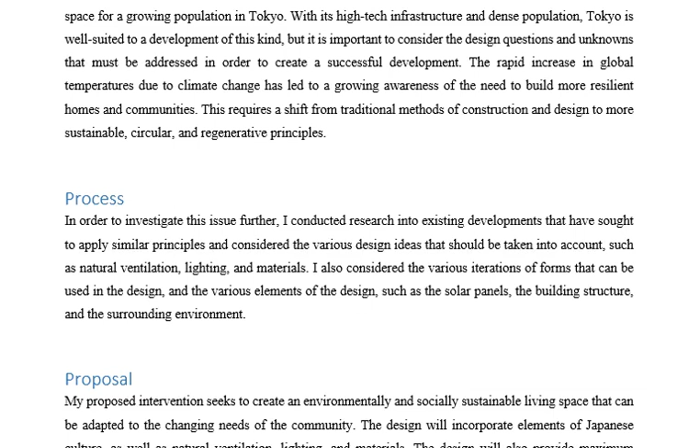Secondly, I also considered various iterations of forms that can be used in the design, and later I will share the design. So the focus is on renewable energy, which is solar panels, building infrastructure, and surrounding environments. There are many things to discuss here, but as time is short, I am focusing on the main things like project location.

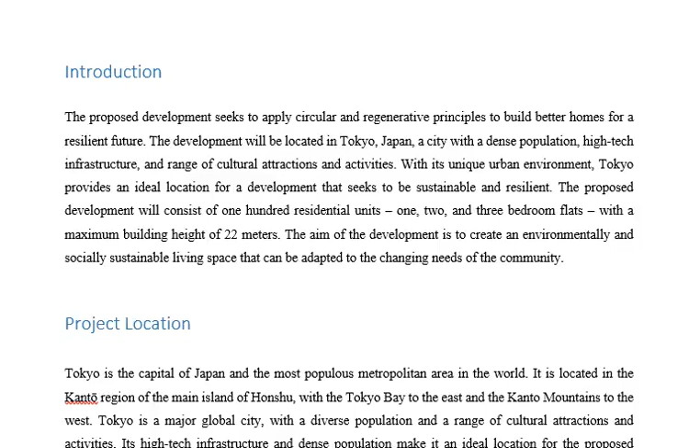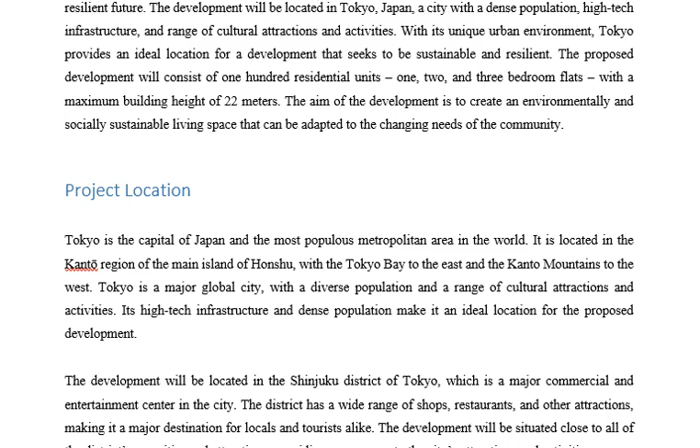Tokyo, as I told you earlier, is the capital of Japan and the most populous metropolitan city in the world, not just in the region but in the whole world. It is located in the Kanto region, and the main island is Honshu. So I selected this region for my prototype.

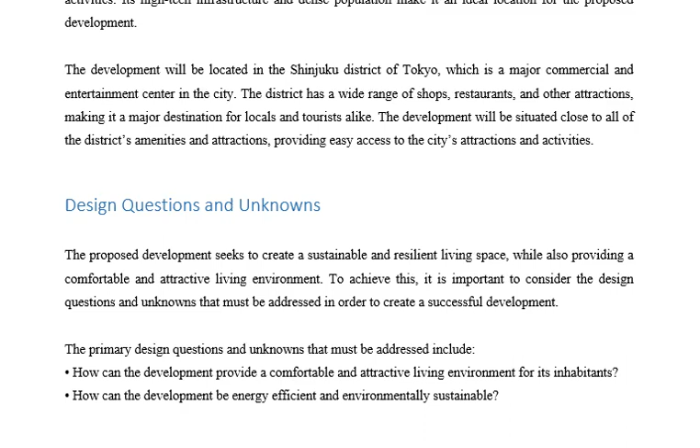The main design questions are: how can we develop and provide a comfortable and attractive living environment for the inhabitants, and how can we develop an energy efficient and environment friendly sustainable environment. There are a few more questions, but the initial research is focused on that.

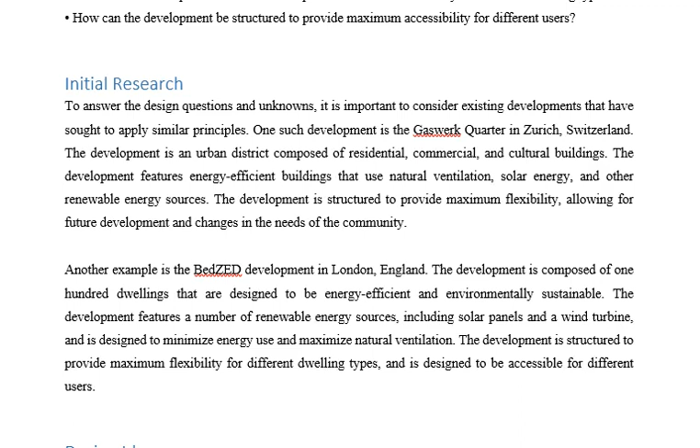These types of prototypes have also been deployed in the current world in Zurich, Switzerland, and also in London, England. But my prototype is totally changed from that because I have reconsidered many things and many ideas. Basically, I focus on four main ideas.

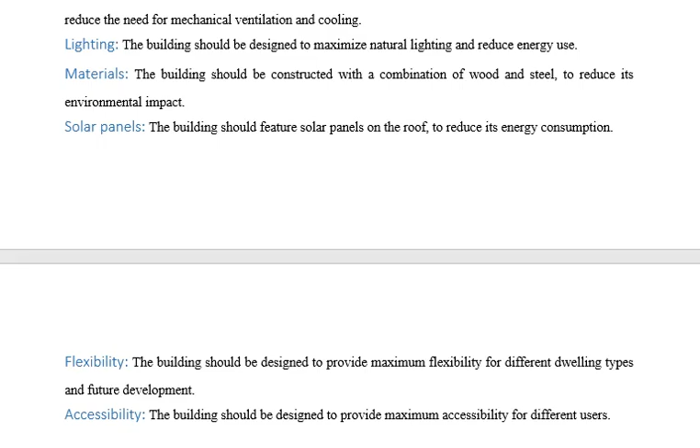The main design ideas depend on natural ventilation, lighting, material, solar panels, flexibility, accessibility, etc. So I will go directly into my ideas.

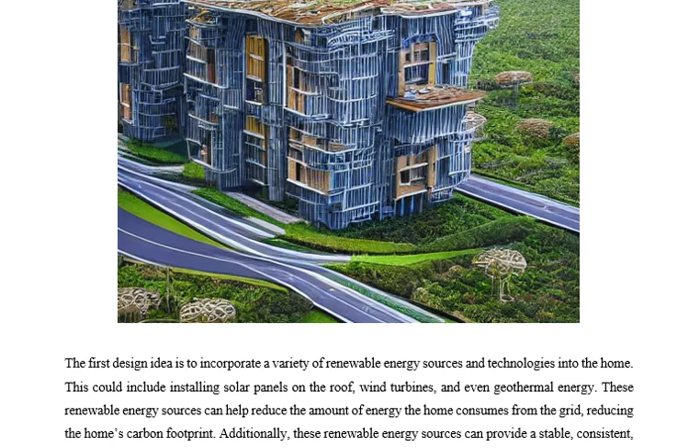This is my first idea, which you can see in the picture. That idea is that I have used renewable energy. You can see the concrete walls are not directly utilized, which enables solar light to directly enter, and that solar light can easily be utilized for the lighting of the homes. Thus the electricity issue and other temperature issues can also be solved using that renewable energy. This could also involve installing solar panels on the roof, and wind energy and geothermal energy can also be utilized.

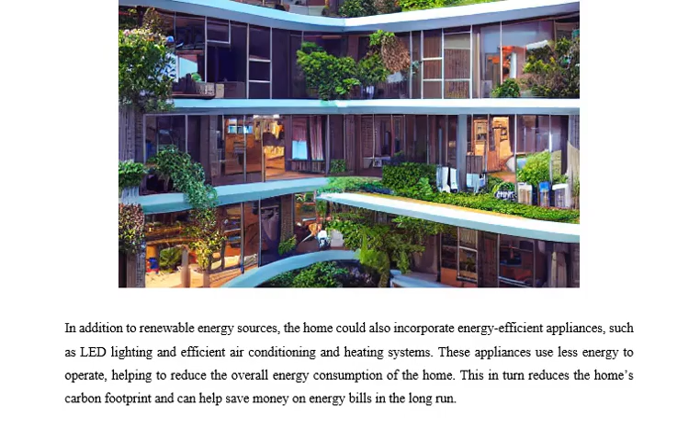The second idea you can see here is about sustainable building materials, like bamboo, stones, and clay. Sustainable building materials have been utilized here. So these are the pictures of that.

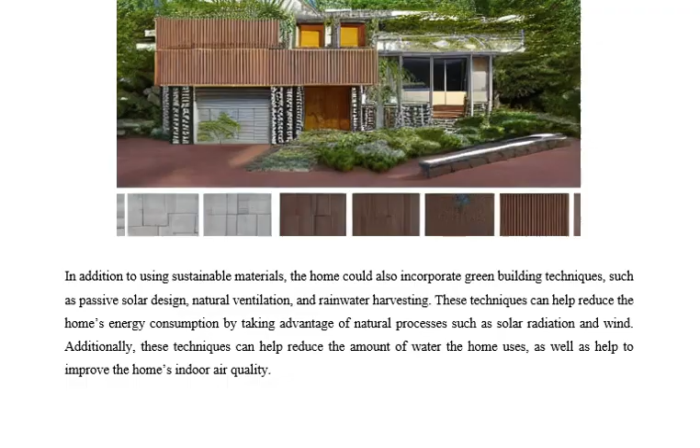And the third idea I have utilized regards the permaculture principle, which is an edible garden using natural elements like soils, stones, and plants, and creating living landscapes over here. So these are the kinds of prototypes here. This is the best architectural design which I have shared.

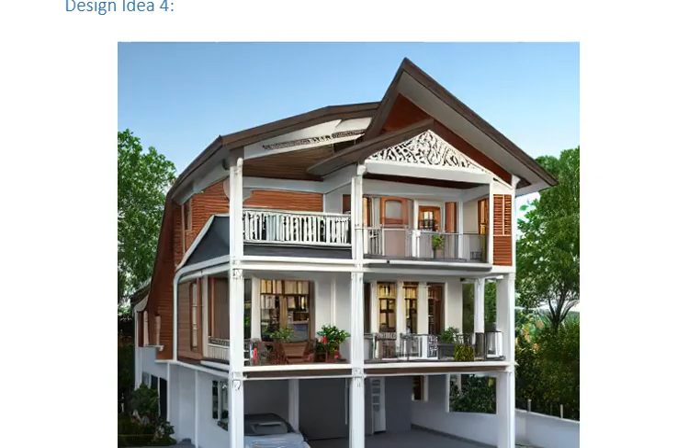And the fourth idea, which you can see here, regards resilient design principles and applying material which is resistant to fire, wind, water, etc., like shutters and impact resistant windows. These types of materials also give a certain type of protection from natural disasters, and reduce the risk of damage and potential financial losses. So these are the prototypes of that.

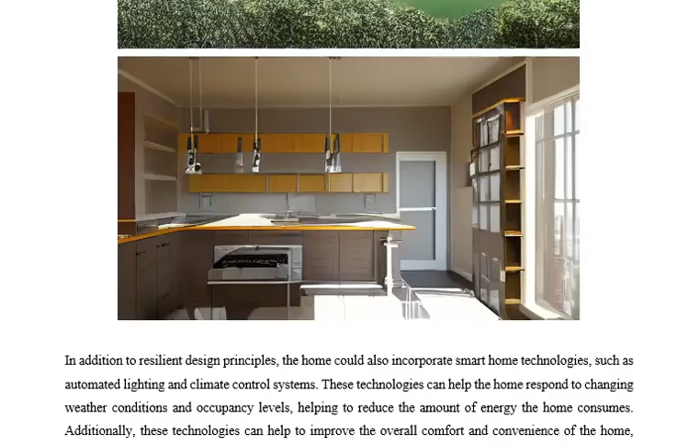And the main idea is to build, as you know, a prototype which gives a sustainable environment to the homeowners over there. So that's my main idea.

The conclusion is that the proposed development seeks to apply circular and regenerative principles to build better homes for the resilient future. The development will be located, as I told you earlier, in Tokyo, Japan, and the design should also take into account the various iterations of forms, as well as energy analysis and embodied carbon calculation, to determine the energy efficiency and environmental impact of the development.

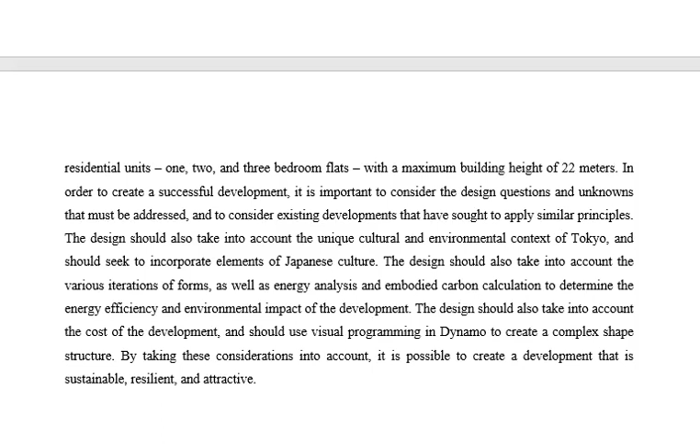The design should also take into account the cost of development, and should also use visual programming such as Dynamo to create complex shape structures. By taking these considerations into account, it is possible to create a development that is sustainable, resilient, and attractive.